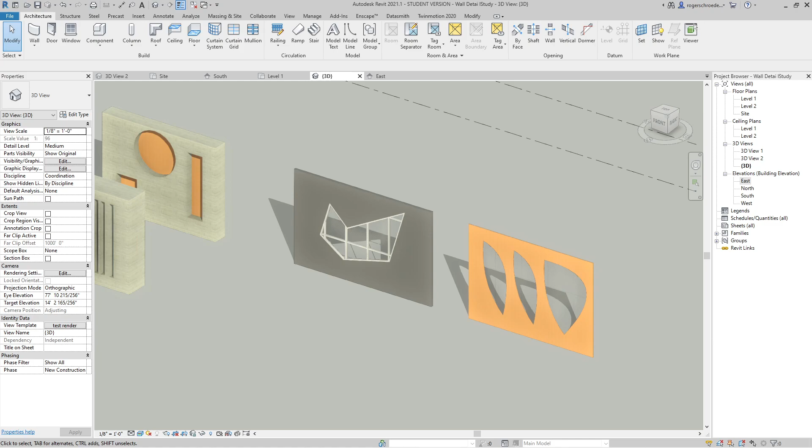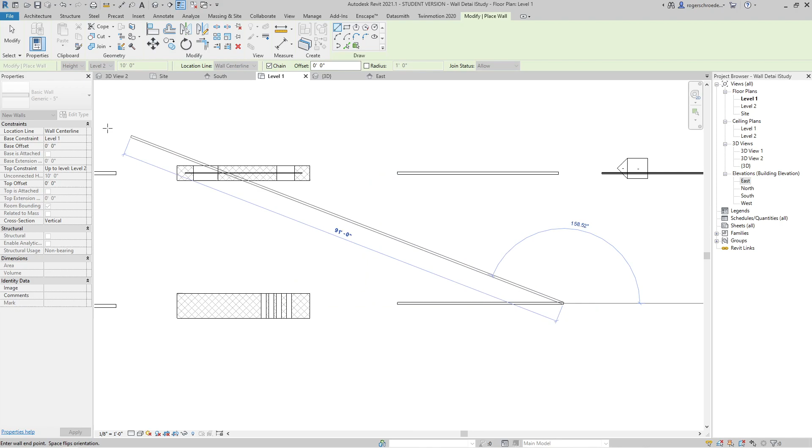We'll go ahead and start by going to level 1 again. I'll zoom out until I can see my walls here. This is where I want to build this one. I'm going to grab the wall tool. I want to use an exterior, let's say we'll use a generic 5-inch. I'm not getting an indication that the end of the wall, which really doesn't matter.

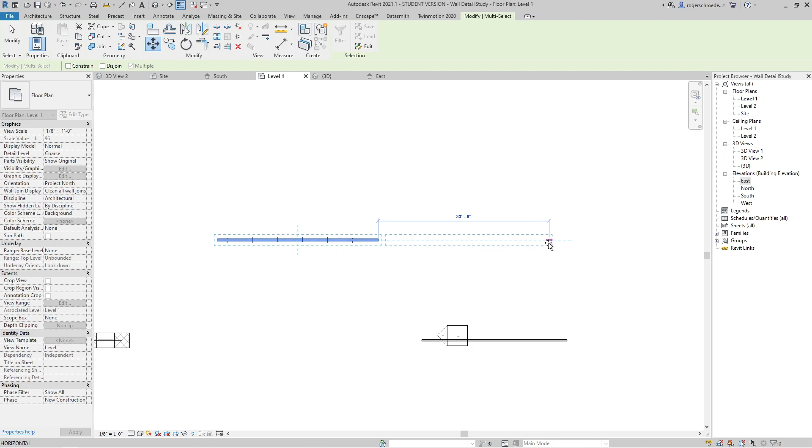What I do want to do is get this wall out of the way temporarily. I'm just going to move it. I'll move it up 20 feet, and then over 20 feet. That way I'll know if I want to get it back to the same position. Actually, I'll just move it over 40 feet.

Now we'll go to a 3D view so you can see where we're at. This needs to go up to 20 feet. Right now it's constrained to level 2. We'll go unconnected to 20 feet. That'll make it match the other one that I made previously.

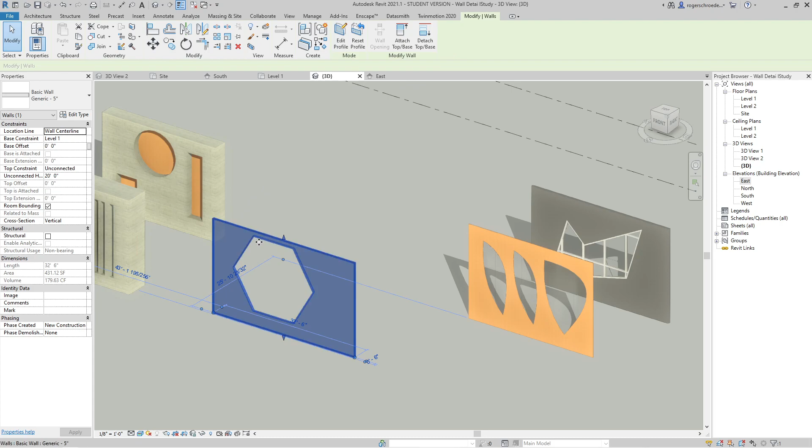Now we're going to edit that profile, or I could have double clicked it. This time we'll make an octagon. No, octagon is 8, so this is a 6-sided polygon. And we'll click done.

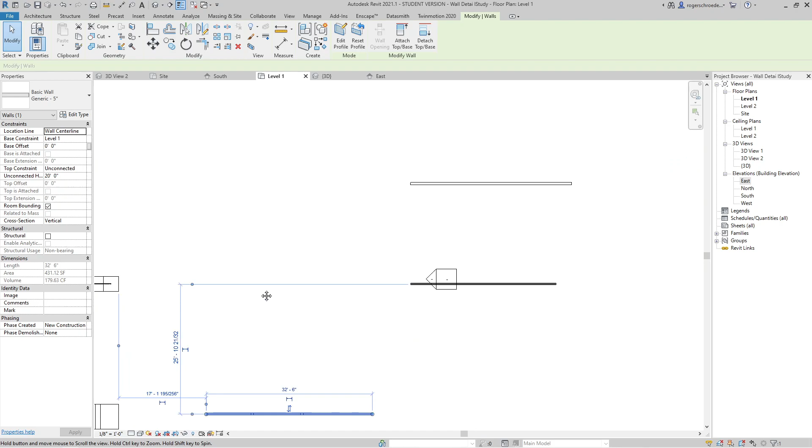Now we want to put some glass in it, so we've got to figure out how to do that. What I'm going to do is try to insert any piece of curtain wall I can, glass storefront curtain wall, in this little tiny space here. I don't want it to touch the edges because I want to be able to go and modify that profile by pulling it out and have it show up really nicely.

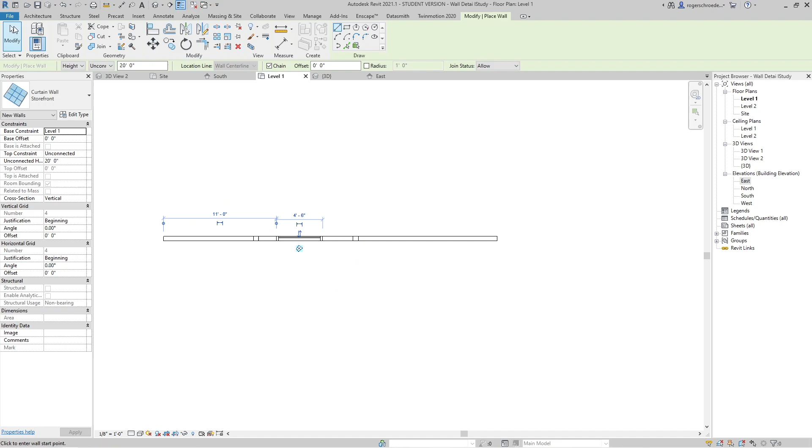So let's first go back to level 1. There's the wall that we're working on. I'm going to go to architecture, wall, grab our curtain wall, or excuse me, our storefront. I'll sneak right in here. I just put the littlest piece of glazing in.

Let's go back and look at it in a 3D view. You can see it's connected up in the top and the bottom. What I'm going to do is just pull that down on both ends.

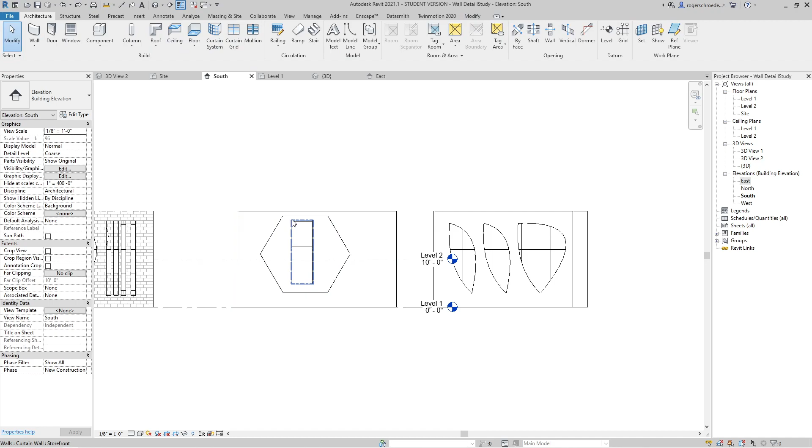And we're going to go right to the south elevation now, so we're looking directly at it. I'm going to double click on the outside of it. Let me undo that because that was a quick move. I'm going to grab this. You'll notice sometimes you grab this, sometimes you grab the outside. If I select the outside, it'll allow me to edit the profile.

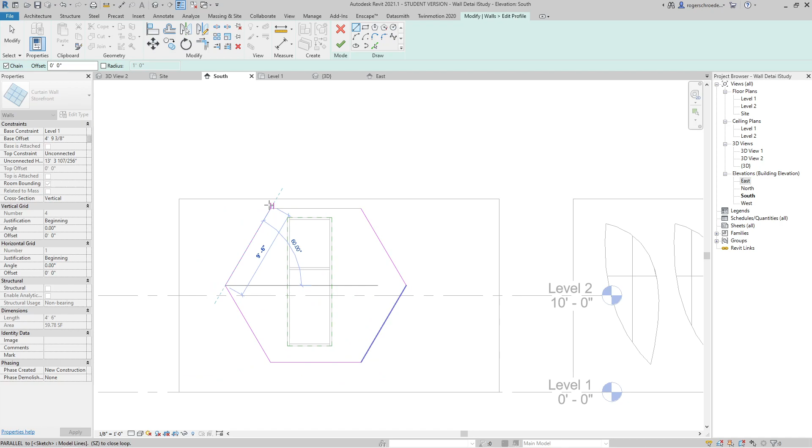Now we need more lines than we have here, so we could just about delete these completely. We'll walk around this grid, really just completely redefining that curtain wall or that storefront that's going to go in. Let me fix this edge that I screwed up here.

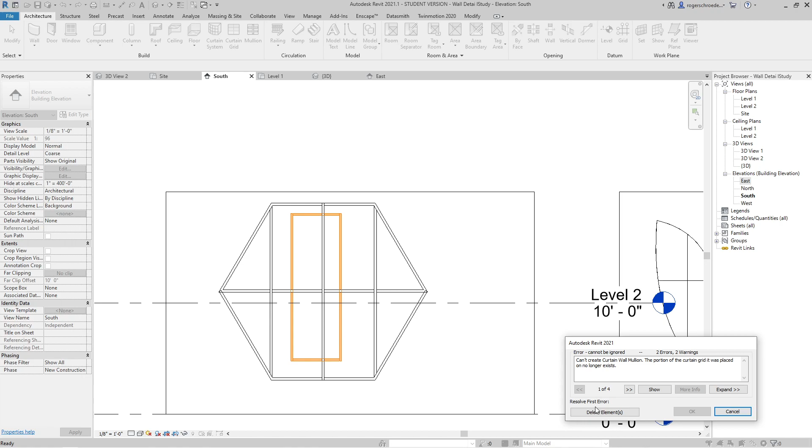We'll click done. A warning will come up that some of the things created in the last drawing can't be used again, and that's no problem. We're going to select delete element. And we'll go to the 3D view, and there we have that inserted in.

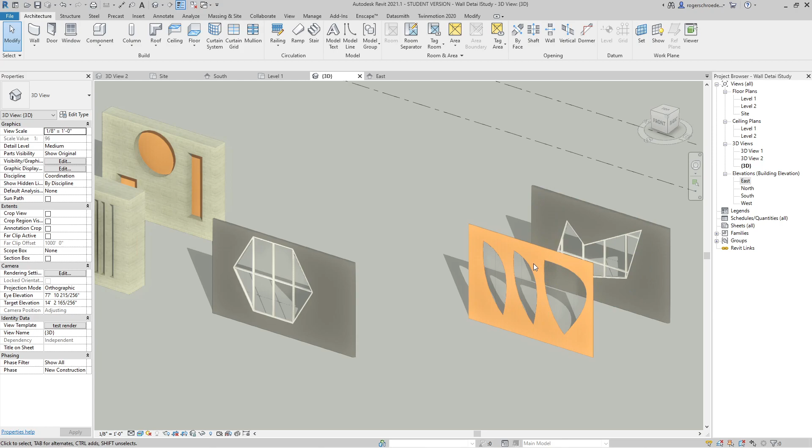Then I could just bring the other one over, but I won't bother you in the video clip doing that. So we'll take a last look at this idea of putting a patterned wall over a glazed wall behind it.